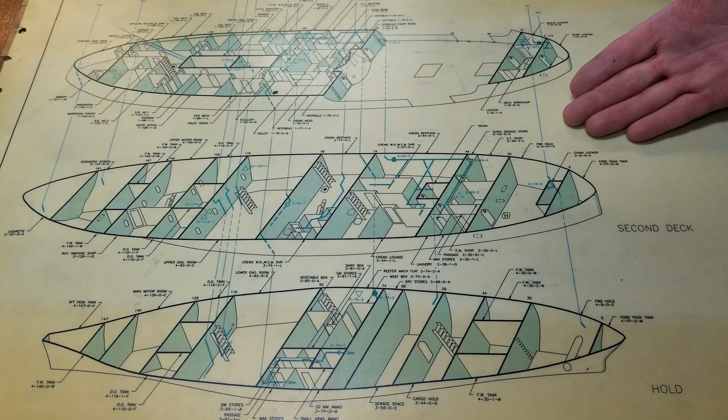So back here in the wardroom, we have what's called damage control diagrams for the ship. So as an investigator, you're going to be called on by the scene leader to go investigate or inspect a compartment. So you're the eyes and the ears of the scene leader. So it's important as the investigator that you know the lay of the land. You know your ship. You know the names of compartments. You know the numbers of compartments, what they're called, what's above and below, behind and in front of these compartments, because you're looking at a box that has overheads, decks, bulkheads.

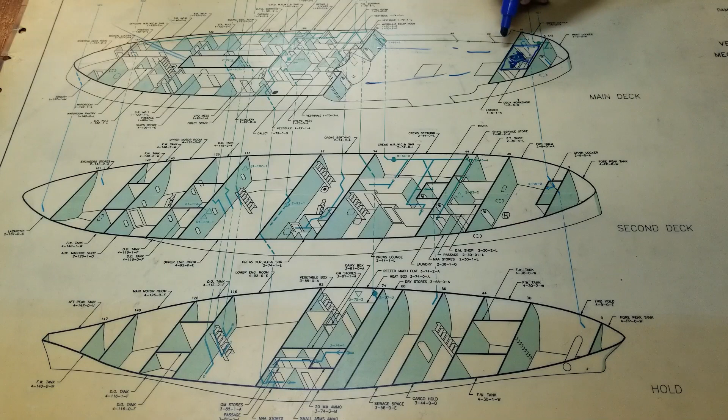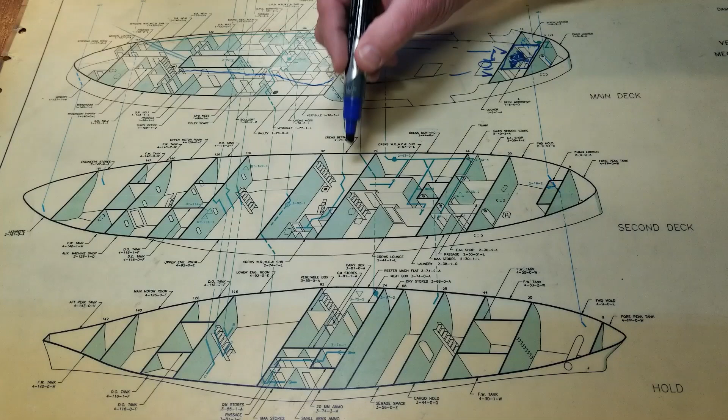So you're going to transit from the wardroom through the passageway, past the ship's office, the chief's mess, into the mess deck, into the thwartships passageway, then drop down this ladder right here, which goes into forward berthing, past the head, into this watertight door right here, which opens away from you, into this passageway to the next watertight door that opens towards you, and you find yourself in number 1 hold. So once you get there, you're going to investigate, because that's your job. So what you're going to do is look around.

Look in the overhead, look for signs or symptoms of a spreading condition. So if the fire is starting to spread, the deck of the bosun hole is the overhead of number 1 hold. So we could have a fire erupt in there. So any kind of combustibles or any kind of materials around here, you'd want to move that stuff out of the way. But first and foremost, you want to make the report to the scene leader of what you've observed. Because like I said, you're the eyes and the ears of the scene leader. So make those reports. You may have to take some immediate actions.

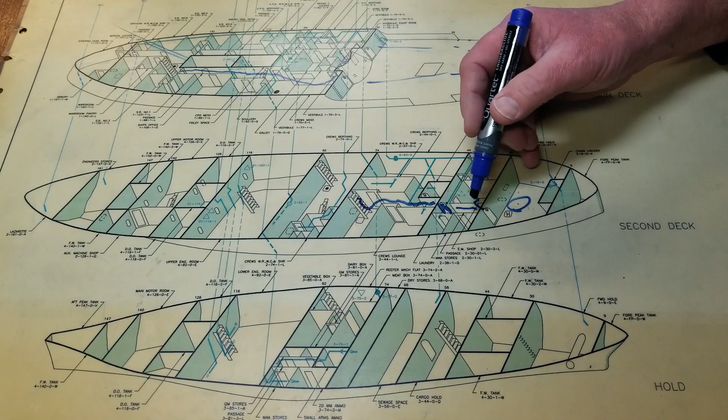You may have to back up out of there and set a fire boundary or a smoke boundary at this transverse bulkhead right here. You notice we've got a lot of them on the ship. These are the major bulkheads that we want to keep stuff contained. So if we've got flooding or fire in this area, we don't want it moving on into here. So we're going to set these boundaries to slow it down.

So once you make those reports, like I said, you may have to take some immediate action. So be conscious of what's around you. Also be conscious of your egress. Because if you have to back out of there in a hurry, you need to know how to do it confidently, especially if the lights go out.

So there's a possibility that you may be wearing a self-contained breathing apparatus, or an SCBA. So you should also know how to don one of those, how to turn on the air, how to activate the thing, because that's what's going to give you fresh air in the case that you need fresh air. So like I said, an investigator has to know his or her ship. So know your ship.